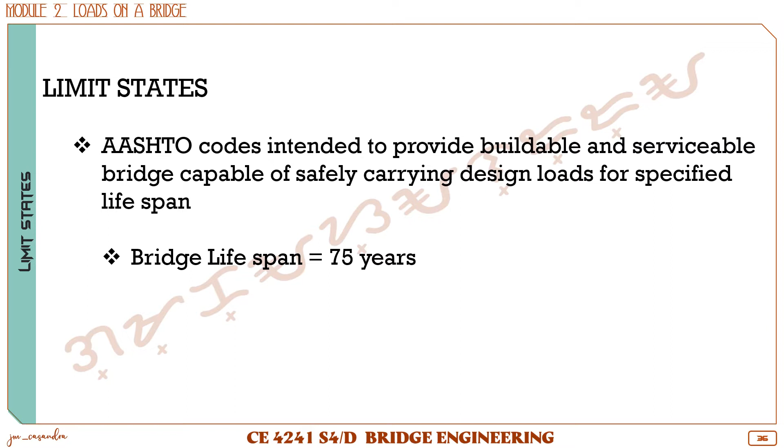So when we see the lifespan of a bridge, that is given to be 75 years. So when we are designing bridges, we should expect that our design should be able to be serviceable within 75 years.

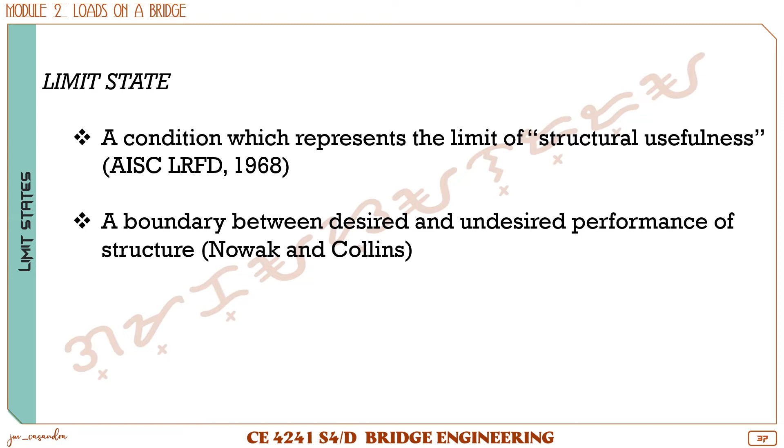So a limit state is defined by AISC-LRFD as a condition which would represent the limit of structural usefulness. It means this is a boundary between the desired and undesired performance of the structure. It's a condition beyond which the bridge or the component of the bridge would cease to satisfy the provisions for which it was designed. So from the term itself, the limit state, it's the limit at which the bridge will be able to be of service, of use to the purpose it was designed.

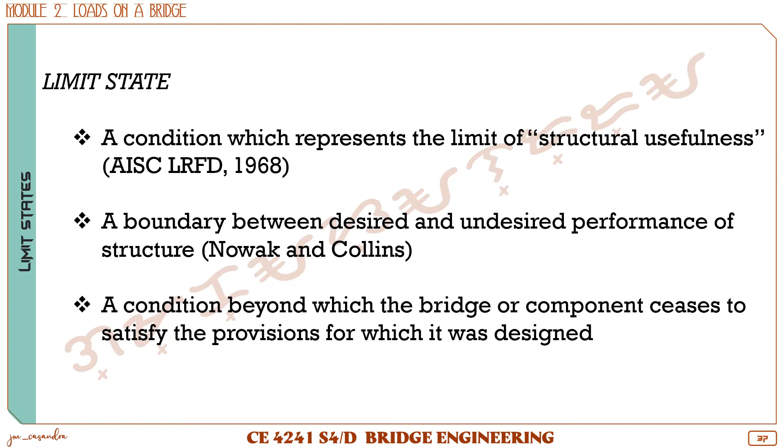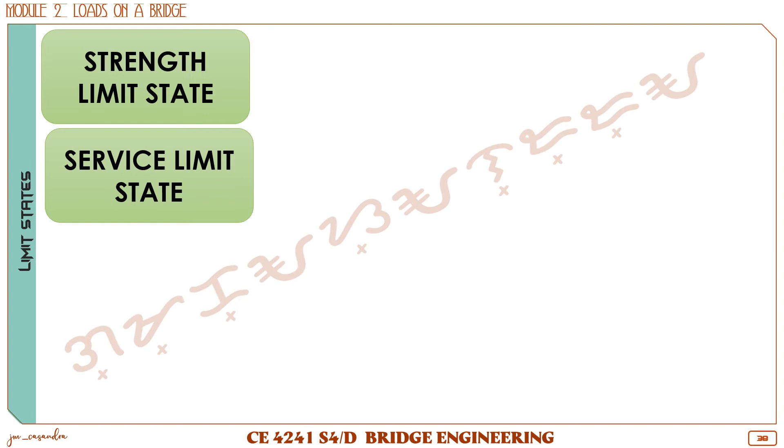So for our limit states, we have 4 different limit states: the strength limit state, the service limit state, the fatigue and fracture limit state, and the extreme event limit state. The strength limit state is a limit state that would ensure that both local and global strength and stability of a structure is capable to resist statistically significant load combinations experienced during the design life of a bridge.

While for service limit state, this is now used to control the stress, the deformation, deflection, and crack width under normal service conditions to ensure structure serviceability.

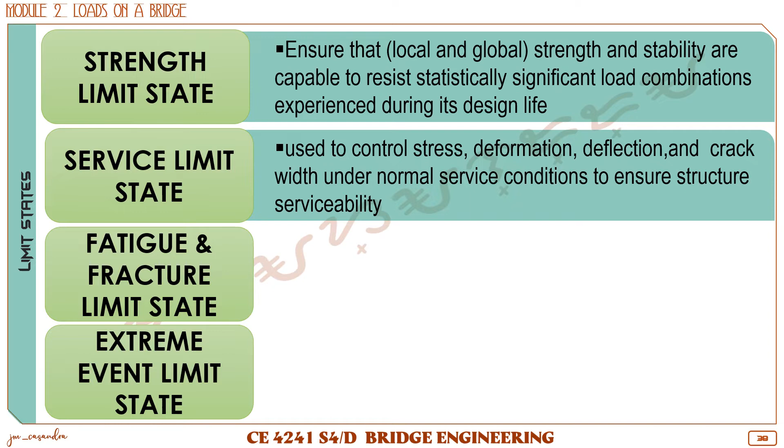For fatigue and fracture limit state, this would now apply restrictions on the stress range under regular service conditions, reflecting the number of expected stress range excursions.

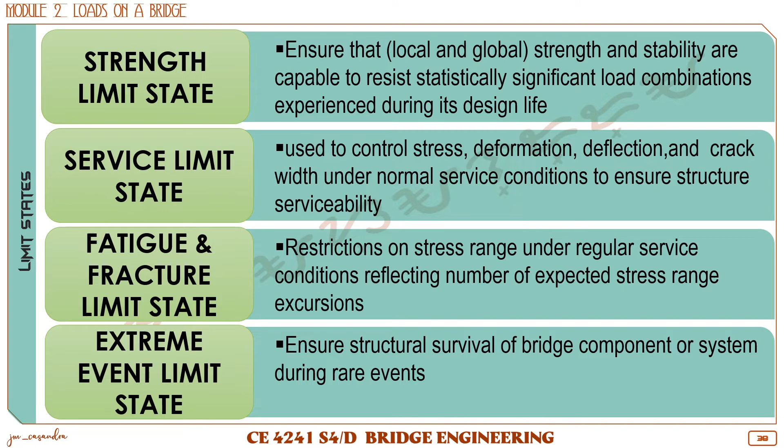When we say extreme event limit state, this would now cover structural survival of the bridge component or system during rare events. And when we say extreme events, this would now include phenomena such as earthquake, or in the Philippines, we have the typhoon. In the US, we have the hurricanes.

So for our limit states, for the strength limit state, it defines now the safe operation and the adequacy of structure under normal or extreme load condition.

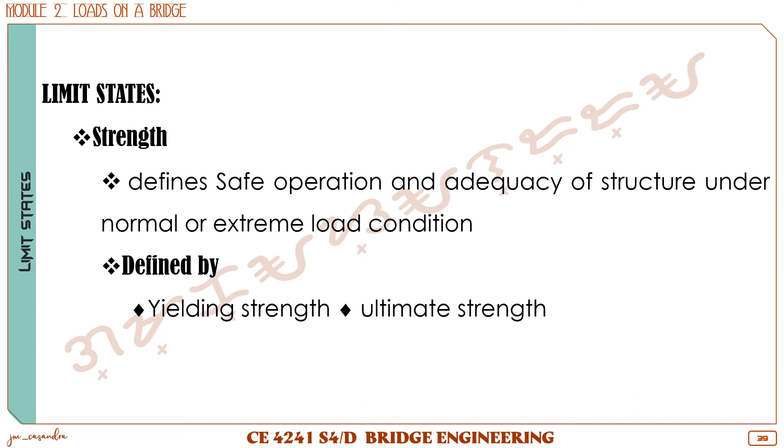So for strength limit state, it would both be designed for the usual phenomenons or usual conditions under our design, and for strength limit state, we would also use this to design extreme load conditions. So the strength of structure based on its limits would be defined by the yield strength and the ultimate strength, the buckling and overturning of the bridge.

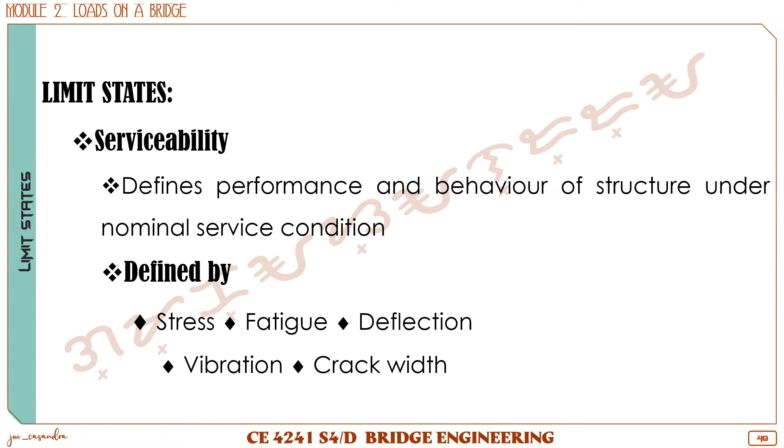For the serviceability or the service limit states, the serviceability will be defined as the performance and behavior of the structure under nominal service condition. So the serviceability would be defined by the stress, the fatigue, the deflection, the vibration and crack width that is present during the design life of the bridge.

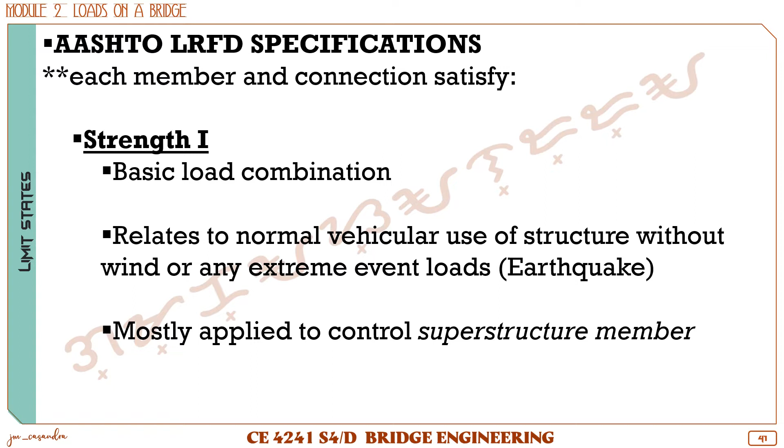For the AASHTO LRFD specifications, each member and connections or components of the bridge should satisfy the following. For strength 1 of the strength limit state, it should follow that the basic load combination would relate to normal vehicular use of structure without wind or any extreme event loads, such as earthquake. And strength 1 is mostly applied to control the superstructure member.

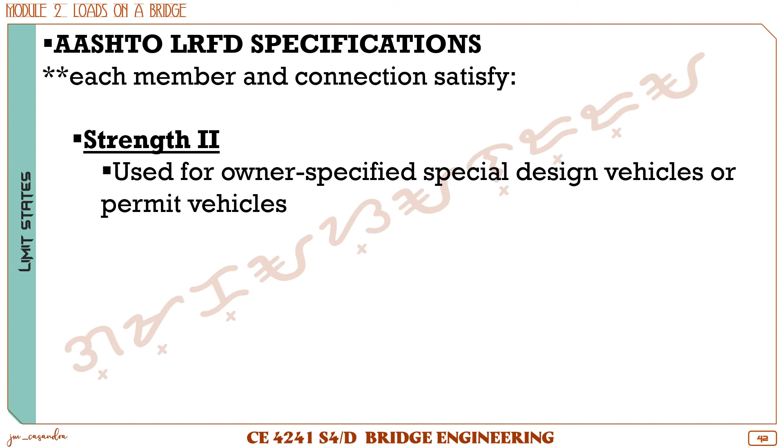For strength 2, this is used for owner-specified special design vehicles or permit vehicles. There's no wind or extreme event loads considered under strength 2.

And though this is existing, it is not commonly used, as we always usually design our bridges, highway bridges, using HL93 loading, and there is usually no owner specified or customized design of the bridge. So for strength 2, this will now reduce the dynamic load allowance in our designs based on the special design of our loading.

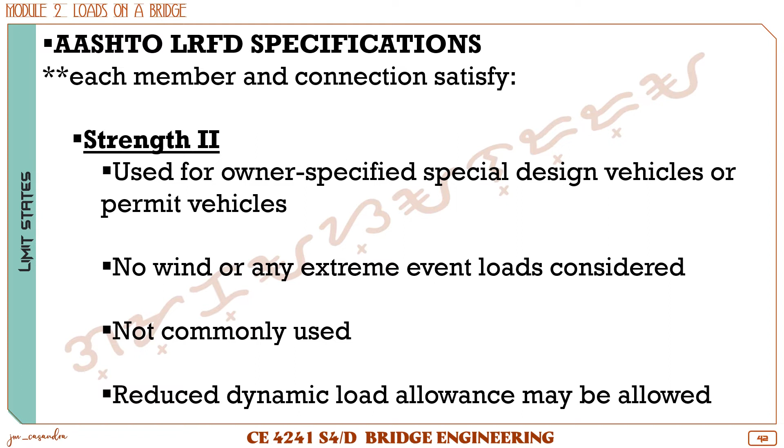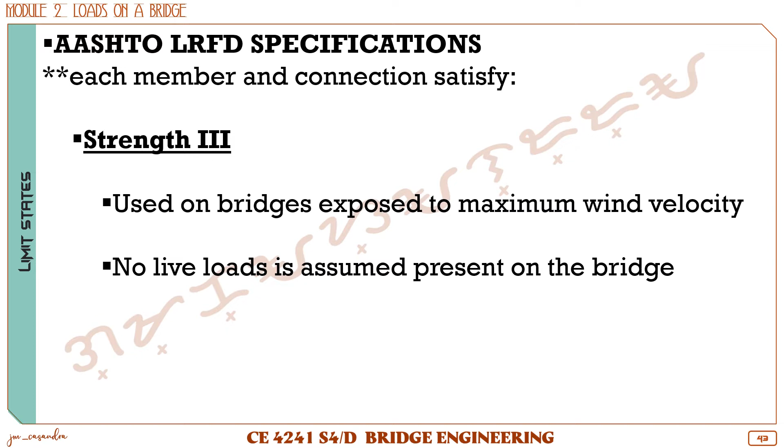And then we have strength 3, which is used on bridges that is exposed to maximum wind velocity. And we are expecting no live loads as assumed that is present on the bridge.

So for strength 3, why do we expect that there is no wind during this or no vehicle load during this scenario? So basically, if there are strong winds, such as hurricanes or very strong typhoons, let's say signal number 4, signal number 5, usually we avoid placing vehicles on the bridge to avoid accidents. Likewise, the use of the bridge by vehicles would be avoided.

So next we have strength 4, which is used for structures with very high dead load to live load force effect ratio.

So if we have very big structures, very heavy structures, this would be the strength limit that we are going to use in our design.

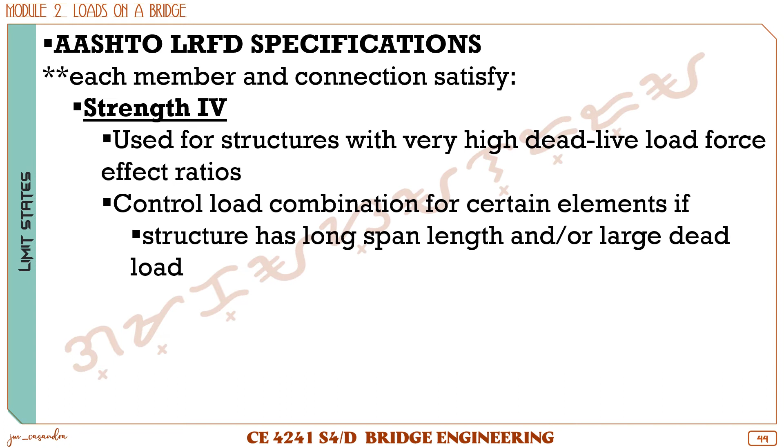This controls load combinations for certain elements or components of the bridge if the structure would have long span length or large dead loads, and the bridges are under construction. Under strength 4, we have to make sure that various types of bridges would have similar failure probability.

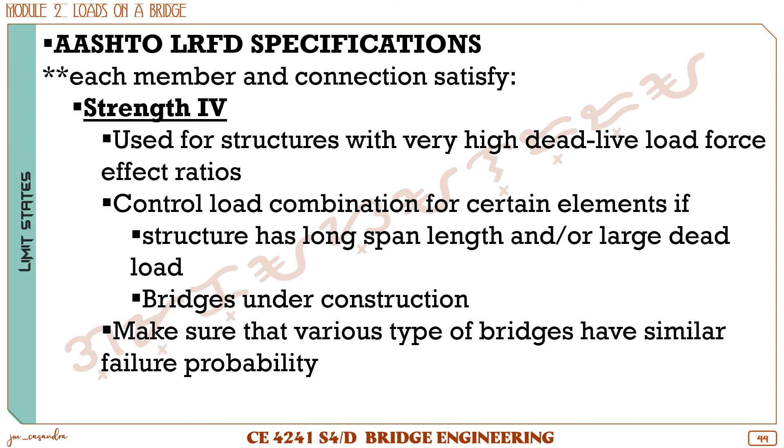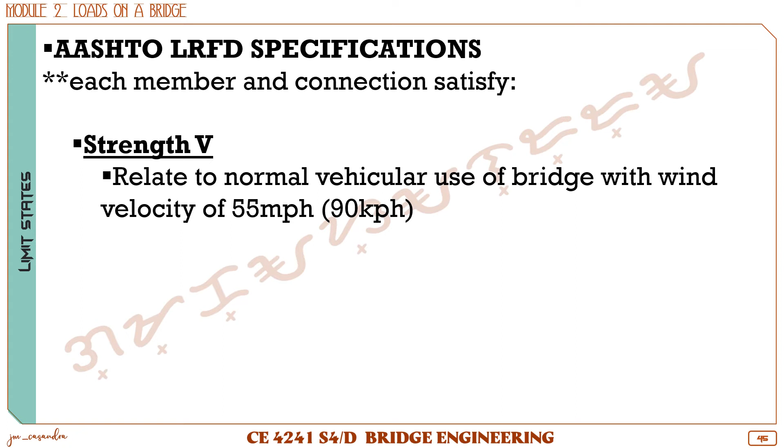For strength 5, this would relate to normal vehicular use of the bridge with wind velocity of 55 miles per hour, or 90 kilometers per hour. So live and wind load will be combined in this design. Both values will be reduced because of the low probability of experiencing heavy live load and extreme high wind load at the same time, same as what I explained with strength number 3. So if there's high wind load, we avoid the existence or usage of the bridge by vehicles or live load.

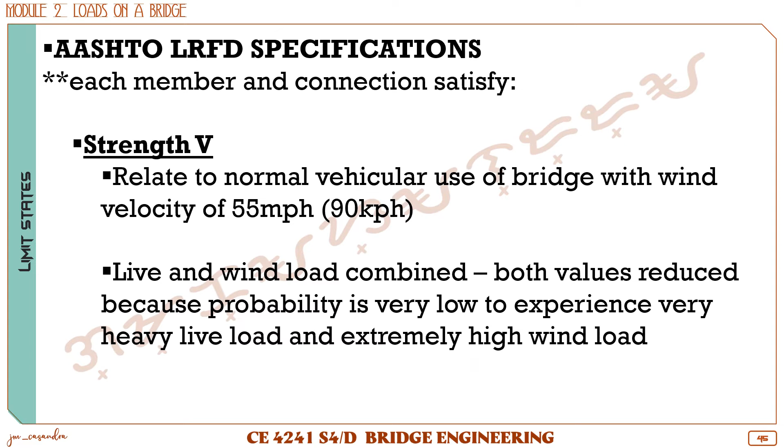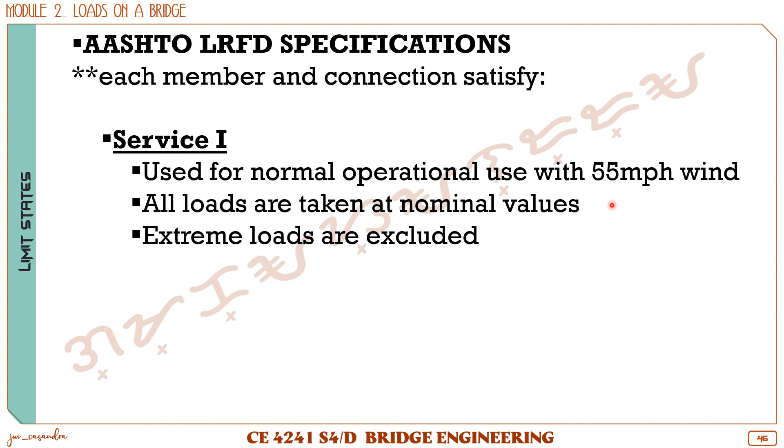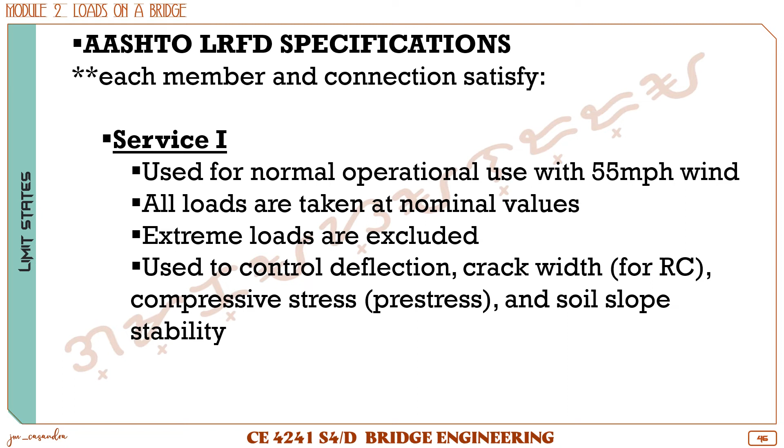Next we have service 1, which is used for normal operational use within 55 miles per hour wind. All loads will be taken at nominal values, and extreme loads are excluded - extreme loads like earthquake, or wind load moving greater than 55 miles per hour. So service 1 will be used to control the deflection, the crack width for reinforced concrete, the compressive stress for pre-stressed concrete, and the soil slope stability of our bridge site.

Then we have service 2, which would prevent the yielding of steel due to the vehicle live load. The live load used is approximately halfway between service 1 and strength 1.

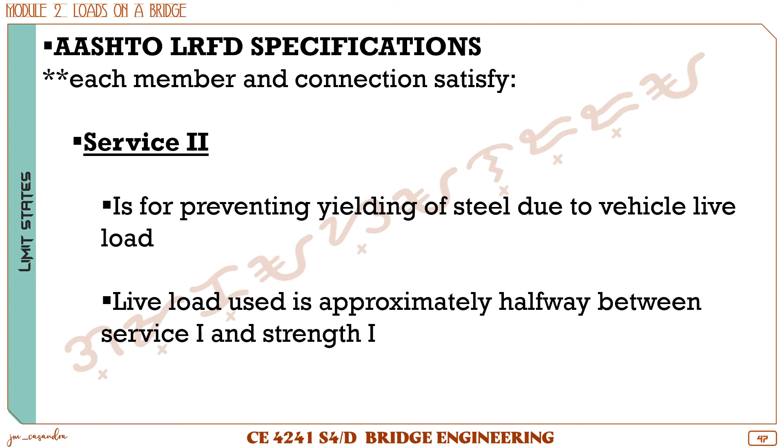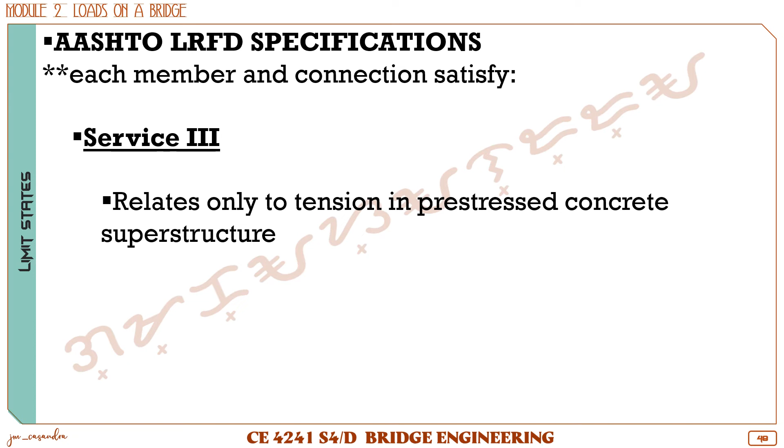Then we have service 3, which would relate only to tension in pre-stressed concrete superstructure, used only for bridges made up of pre-stressed concrete. So the load factor of 0.8 will be applied to the live loads. That is, if nominal design live load is used, the superstructure will be over-designed for concrete tensile areas. Therefore, you have to use the load factor so as not to have an over-design.

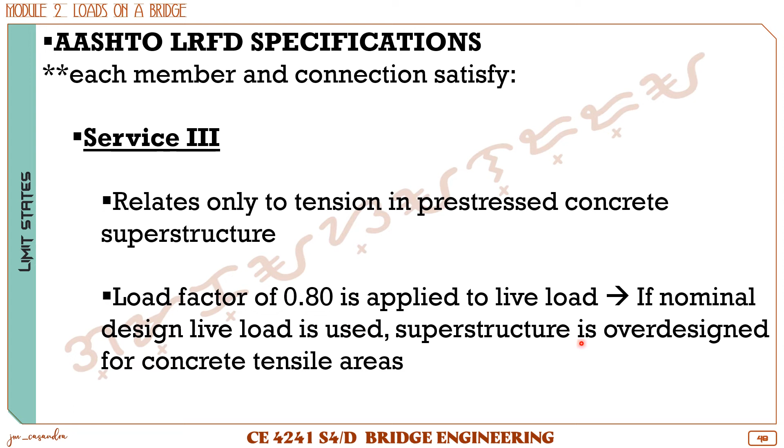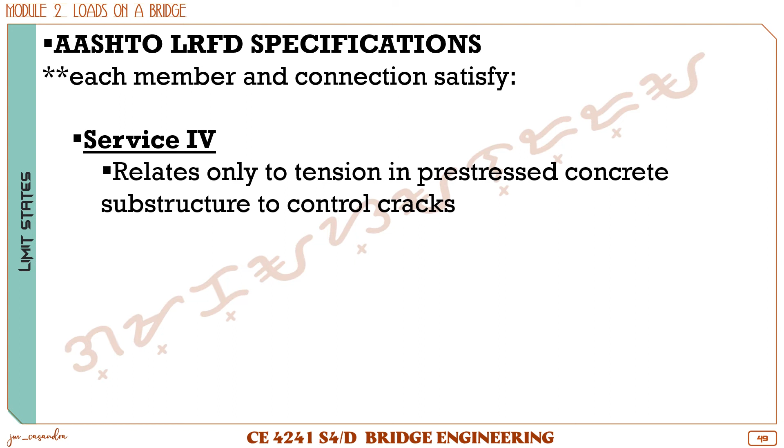Next we have service 4, which would relate only to tension in pre-stressed concrete substructure to control the crack. So the load factor for the wind now will be applied, which is equal to 0.70, and we are assuming that under service 4 the wind load will be moving at 84 miles per hour. This would now reflect the probability that our substructure will be subjected to tensile stress once every 10 years.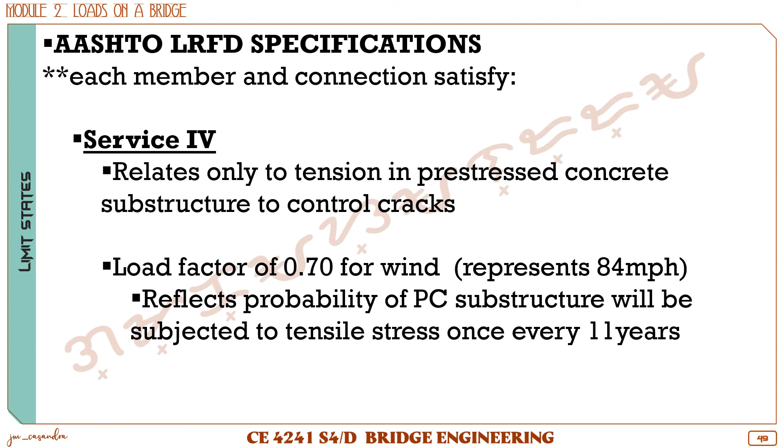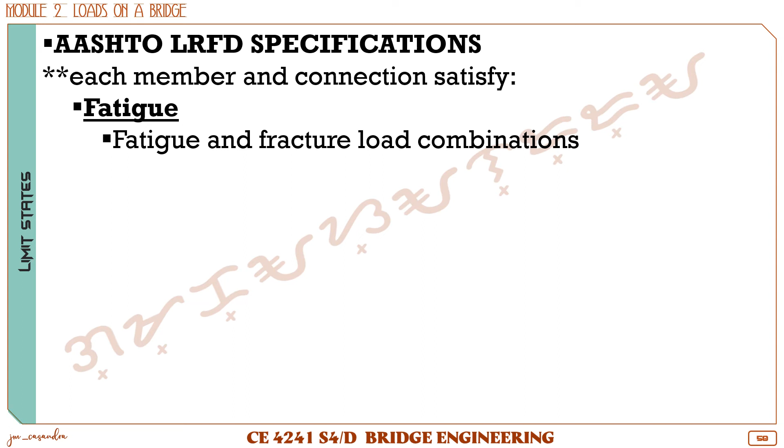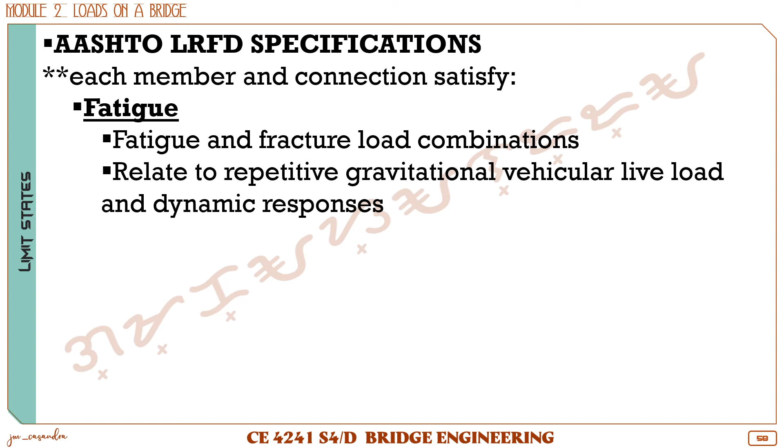Next we have the fatigue limit state. Under fatigue limit state, this is a combination of both fatigue and fracture load combinations. This would relate to repetitive gravitational vehicular live load and dynamic responses, since fatigue would be present as the bridge is constantly used. A live load factor of 0.75 will be applied, representing the cumulative effects of the majority truck population. So there's only a single 32 kip load at 30 feet constant spacing that will be applied in our design using fatigue limits.

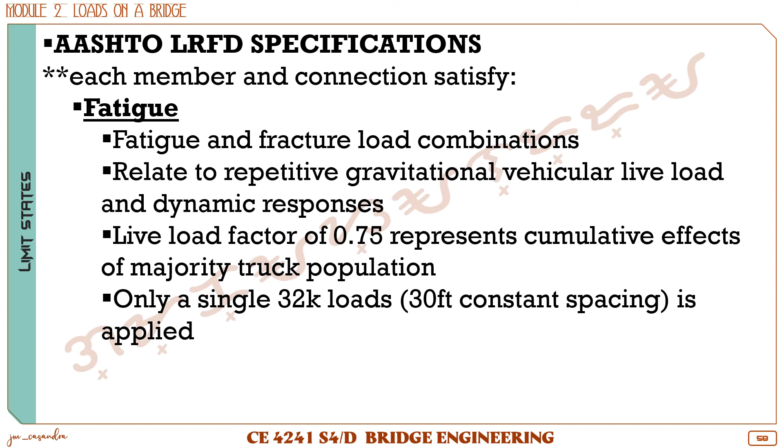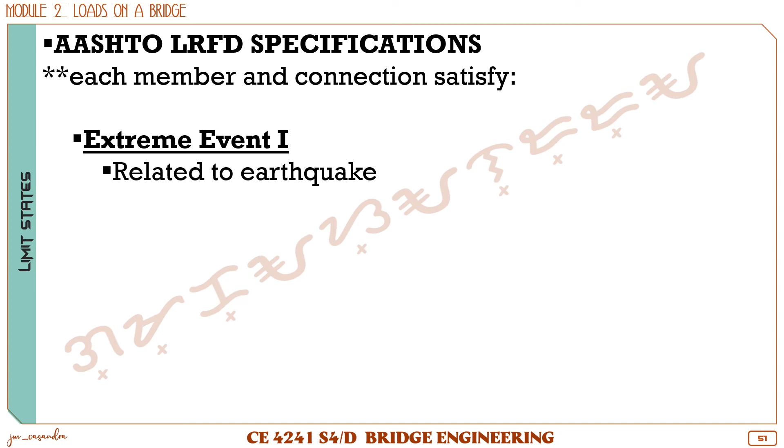Under extreme event, we have extreme event 1, which would be related to earthquake load. Live load considered shall be based on daily traffic volume of bridges. Unlike the wind load - for wind load we assume there are no live loads or vehicle loads on the bridge - for earthquake, there will still be live loads because an earthquake happening is unpredictable. There is a possibility that there are live loads on the bridge while an earthquake occurs. Therefore, under extreme event, we will have both earthquake load and live load present in the design. For a normal bridge, the live load factor under extreme event would be 0.5, which implies low probability of maximum live load at the time of a large earthquake.

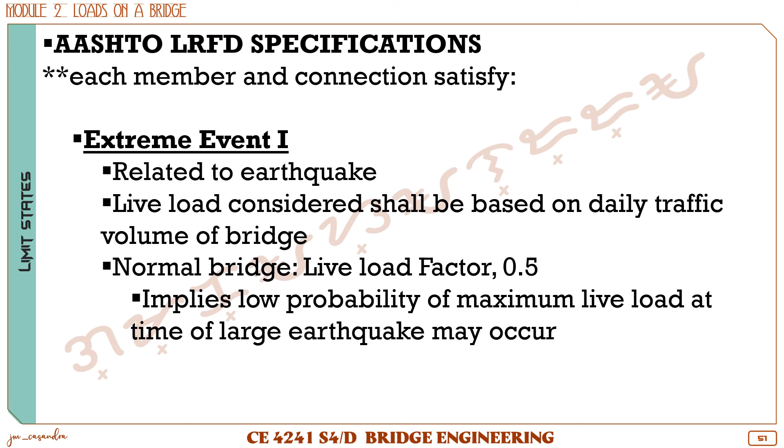Then we have extreme event 2, which will be used for extreme conditions. Examples of these extreme conditions would be ice load, if we are designing bridges for areas that have winter - accumulated snow or ice. Other extreme conditions would include vehicle collisions or vessel collisions on the bridge. Only one of these events should be considered at a time during your design. So in the design, you only design if you're expecting ice load, but you should not expect that both ice load and collision will occur under extreme event.

So under extreme event 2, you will reduce the live loads considered in your design. Live loads will be reduced since when there's ice load, the highway bridge is usually not used much, and when there's a collision of vehicles, there would be a reduction of traffic because the vehicles are constricting traffic flow.